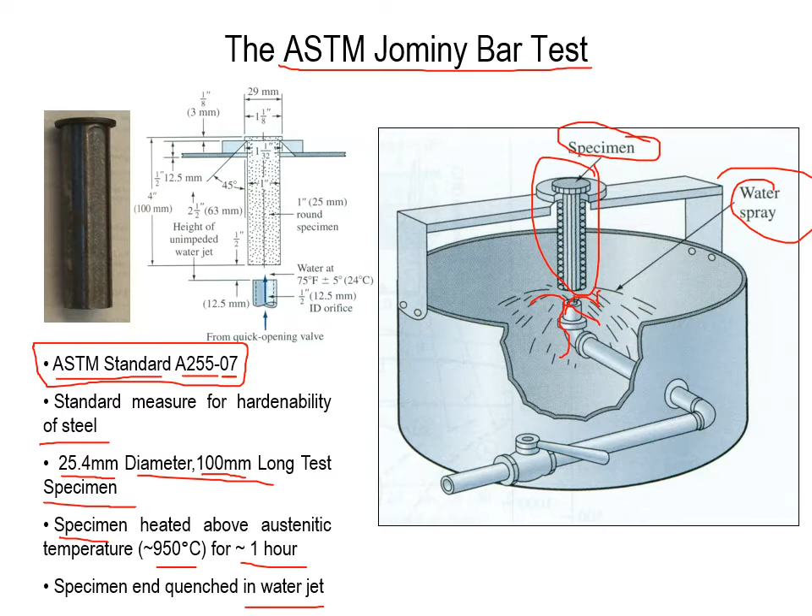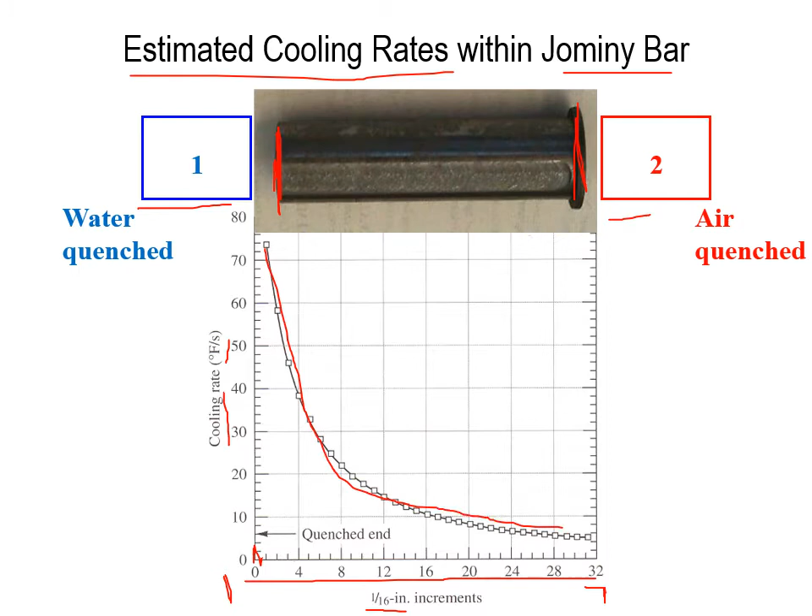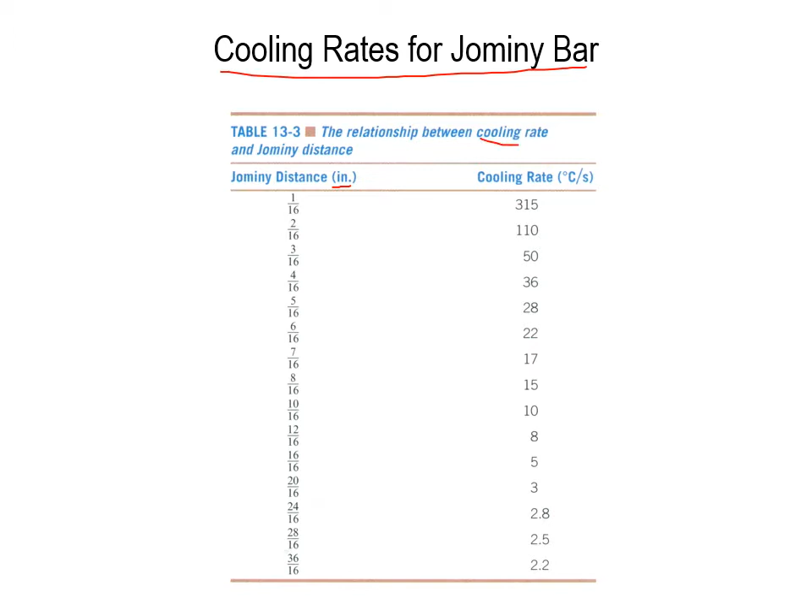Looking at the cooling rates for the bar in this T-chart, we see our distance here, in inches, and the relationship between cooling rate and distance. At a distance of 1/16 inch, our cooling rate in degrees Celsius per second is 315. As we get further away, up to 36/16, our cooling rate drops all the way down to 2.2 degrees Celsius per second.

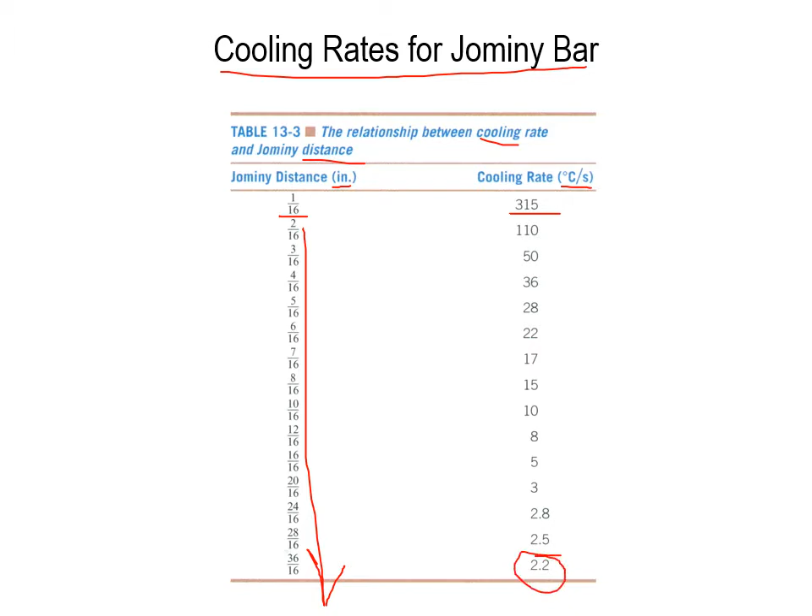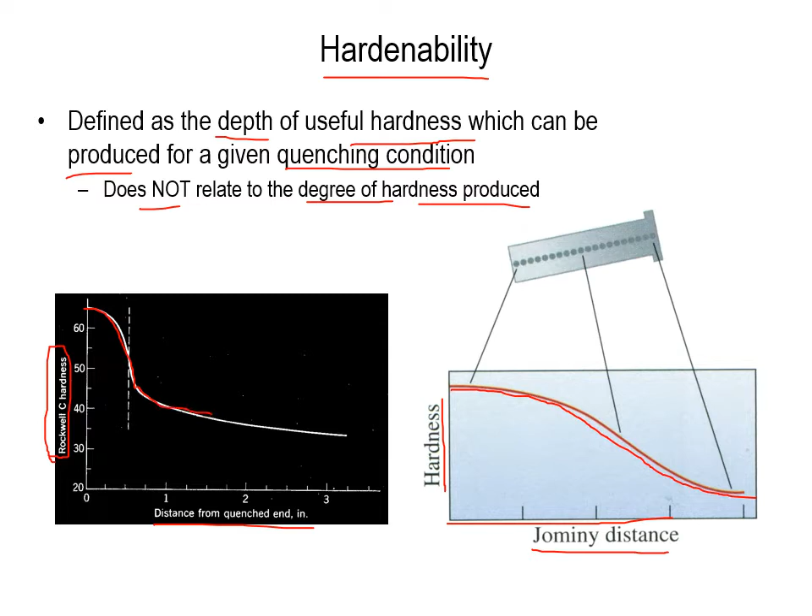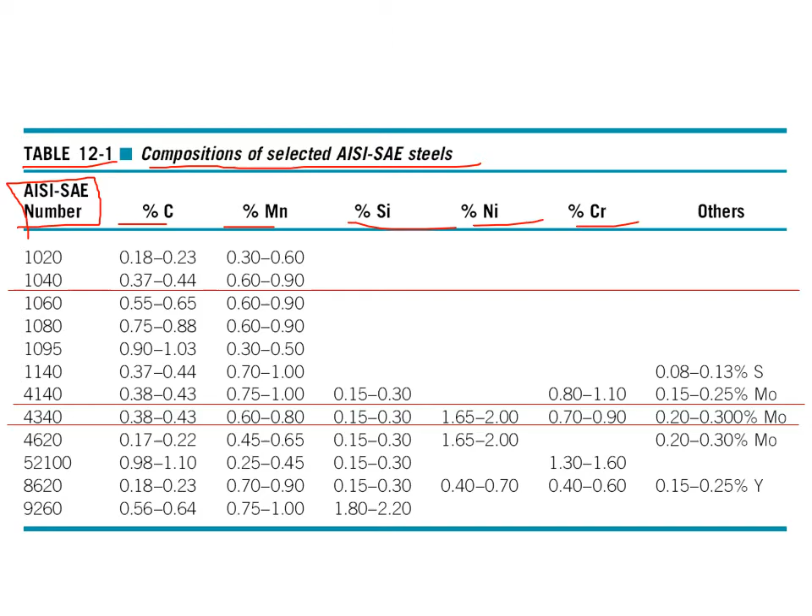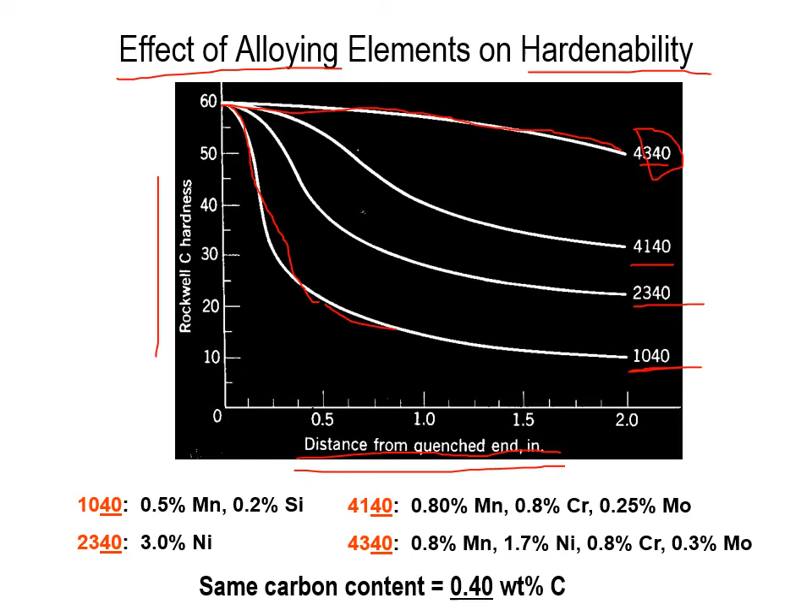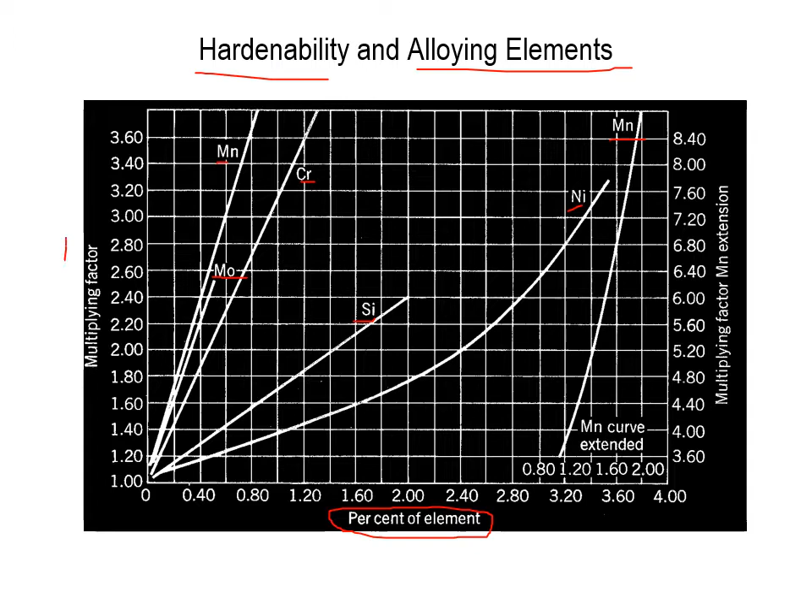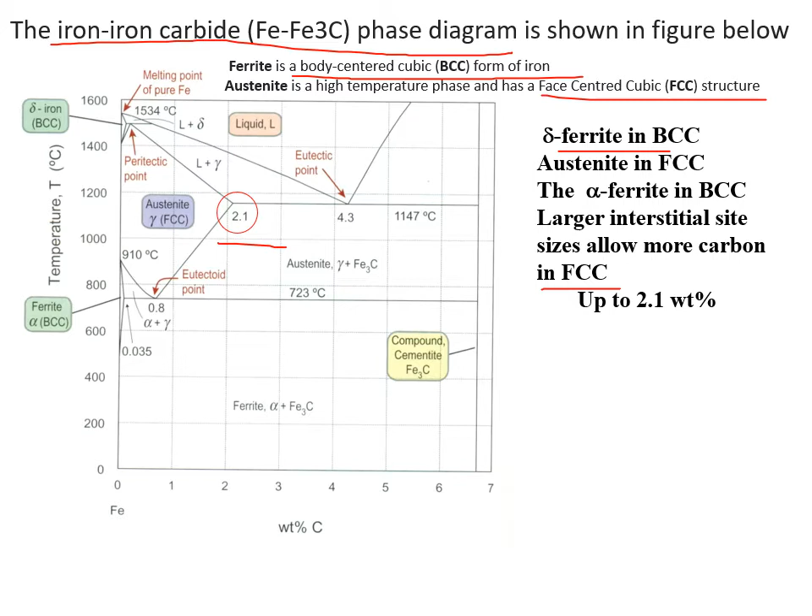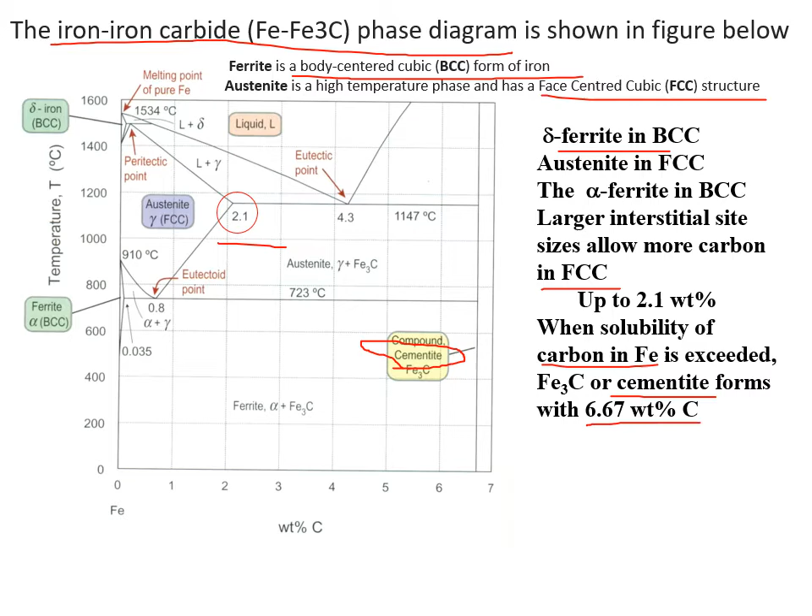When solubility of carbon in Fe is exceeded, we're going to see the formation of cementite down here. So cementite, Fe3C, is going to be formed when the solubility of carbon in the iron is exceeded. You can see here this is 6.67% weight carbon, if we follow that right down to there.

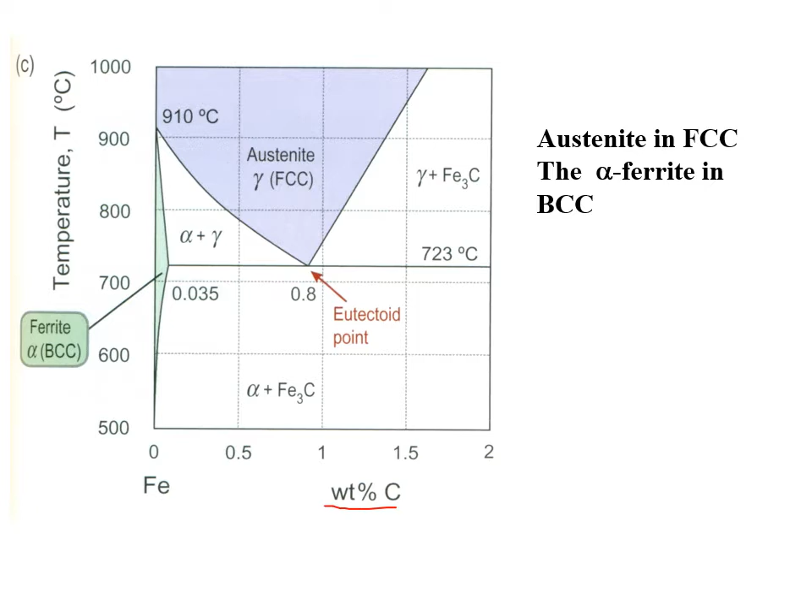In this diagram here, we have our austenite and our ferrite. Austenite again is face-centered cubic, ferrite is body-centered cubic. You can look back over at our graph on our x-axis where we have our percent weight of carbon, and on our y-axis we have our temperature in degrees Celsius.

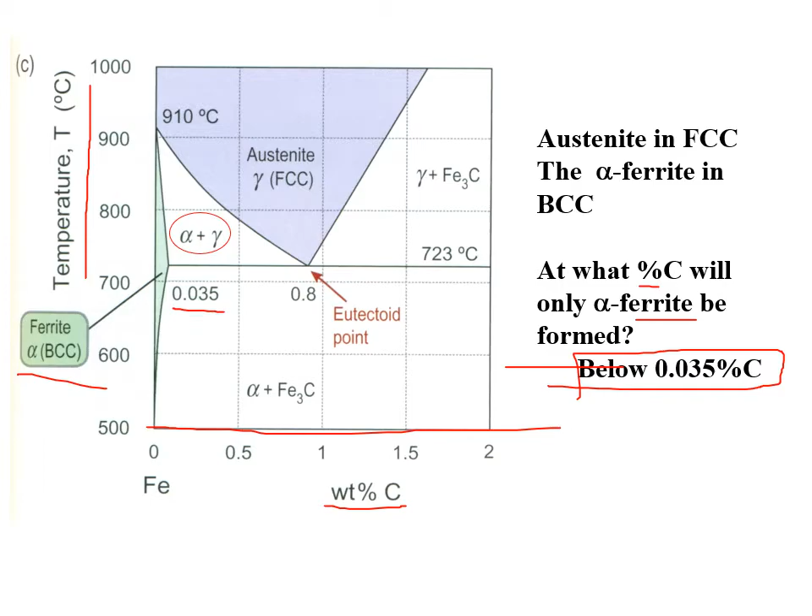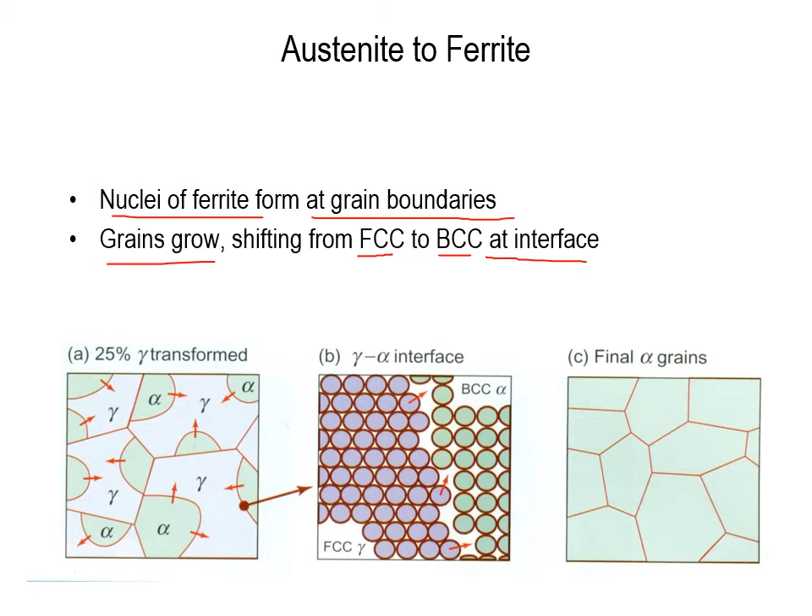Looking again at our percent weight of carbon versus temperature graph, zoomed in now from 0 to 2, what we want to look at is the eutectoid reaction. We can see this occurs at 723 degrees Celsius on our y-axis for a weight of 0.8 percentage of weight of carbon, which we come down to on our x-axis right here.

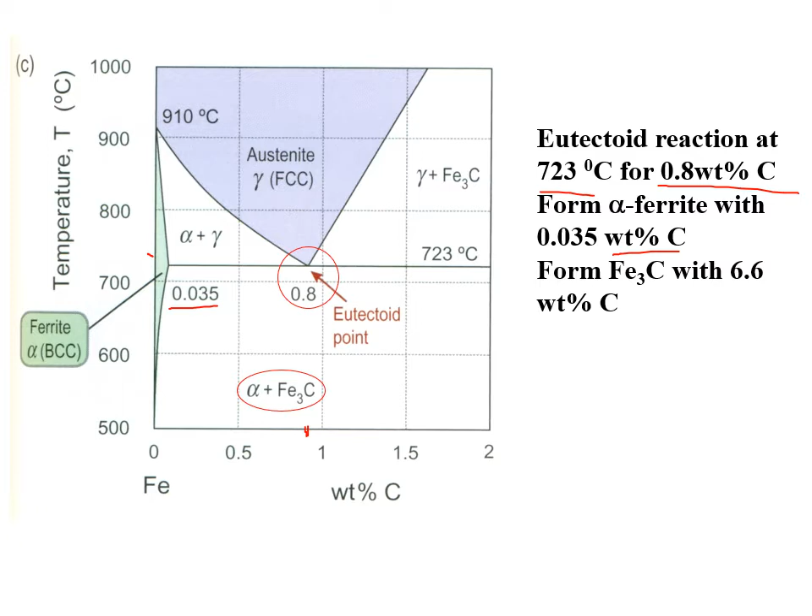Remember, if we take a look over here, we can see ferrite forms with a 0.035 percentage weight of carbon. And cementite forms here, if we recall from a couple slides ago from the larger graph that went out to 7, this occurs with 6.6% weight of carbon. So the carbon in austenite goes to the cementite, and the iron in austenite goes to ferrite, and the result is pearlite.

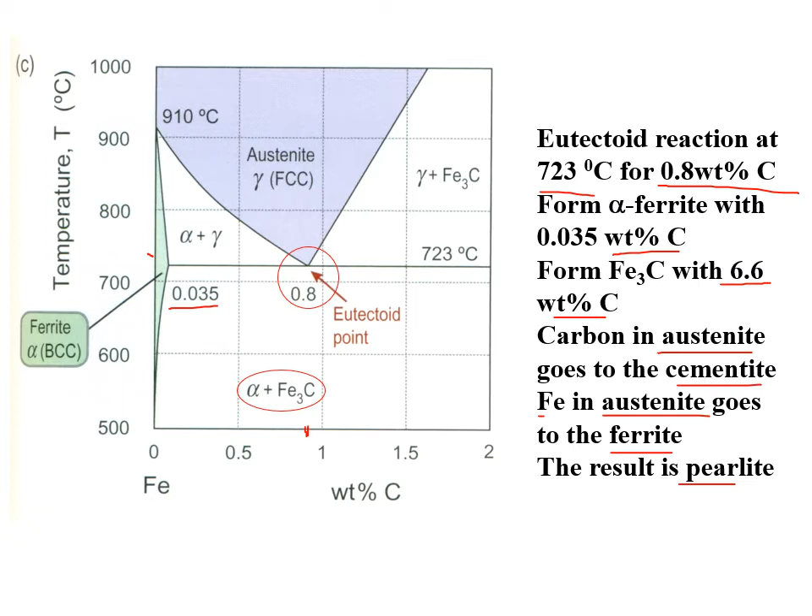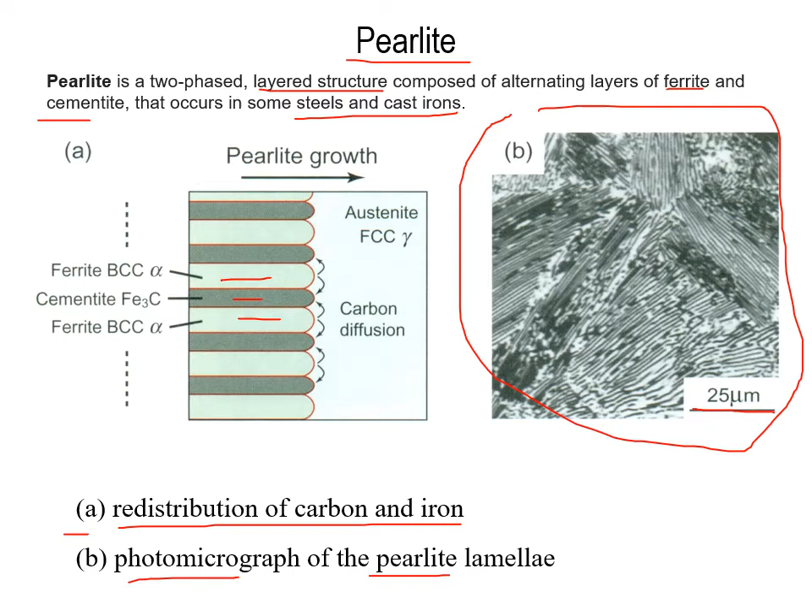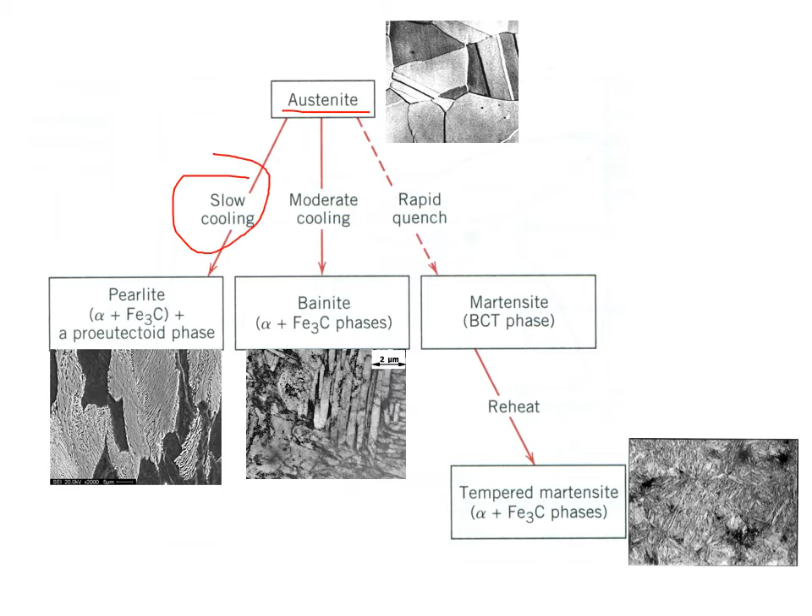In this slide, we can see how our method of cooling the austenite can affect what structure we're going to have afterwards. If we do a slow cooling, we form pearlite. If we do a moderate cooling, we have bainite, and a rapid quench here is martensite. If we reheat this, we can get a tempered version as well. We can see in the diagrams what the structure looks like between the different types of cooling.

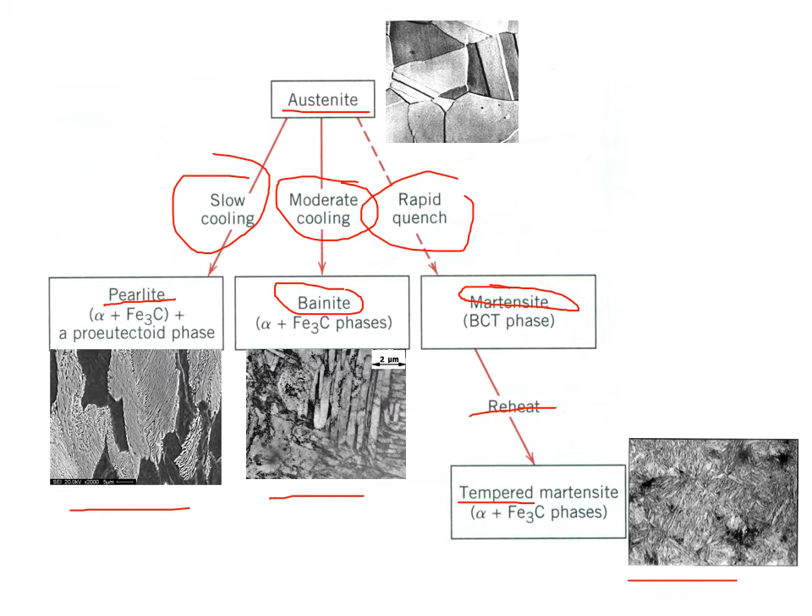Now we're going to discuss our bainite and martensite microstructures. Bainite consists of ferrite plates separated by retained cementite spheres. And now martensite, which is very hard, induces a BCT, a body-centered tetragonal crystal structure of ferrite and cementite.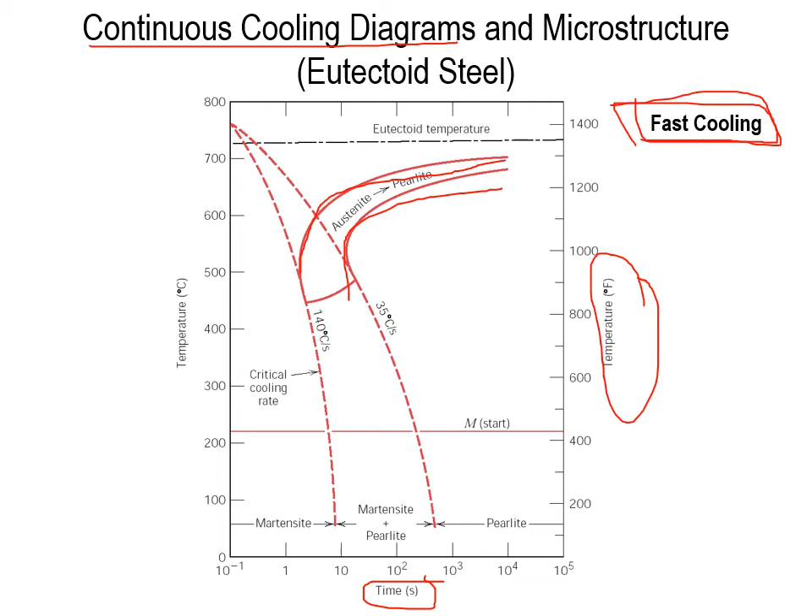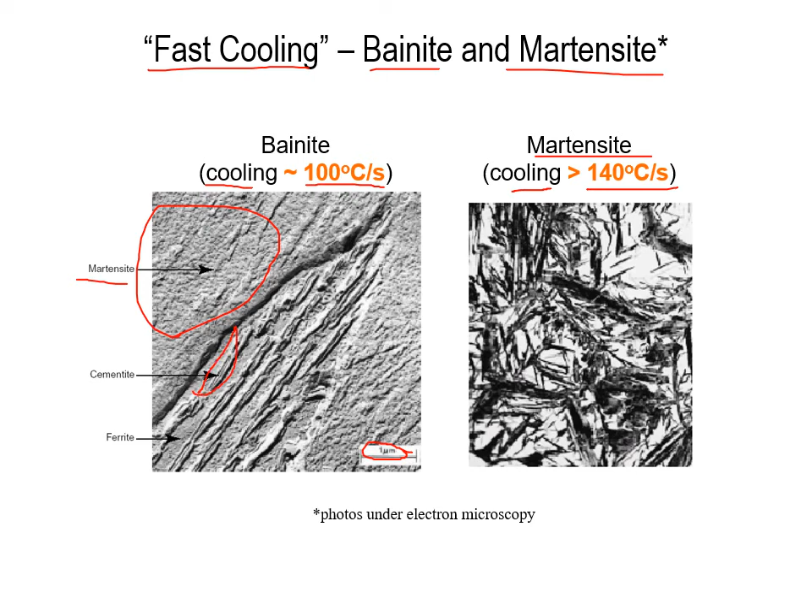Now for fast cooling, we have our bainite and our martensite. For bainite, we're talking about cooling at approximately 100 degrees Celsius per second, and for martensite, the cooling is going to be greater than 140 degrees per second - and we can see the difference in the structures. If we look at the left under electron microscope at the bainite, our scale is 1 micron at the bottom. We can see our martensite in this structure up here. We have our cementite right there, and in between here we have our ferrite.

So now let's talk about the outline for our experiment 4, lab 4. The materials we're going to test are our 1018, 1045, 4140, and 4340 steels. This lab is broken into 2 weeks: week 1 we'll do heat treatment, water quenching, and air quenching. In week 2 we'll move on to Rockwell and Vickers hardness testing. Only one lab report is due at the conclusion of both weeks.

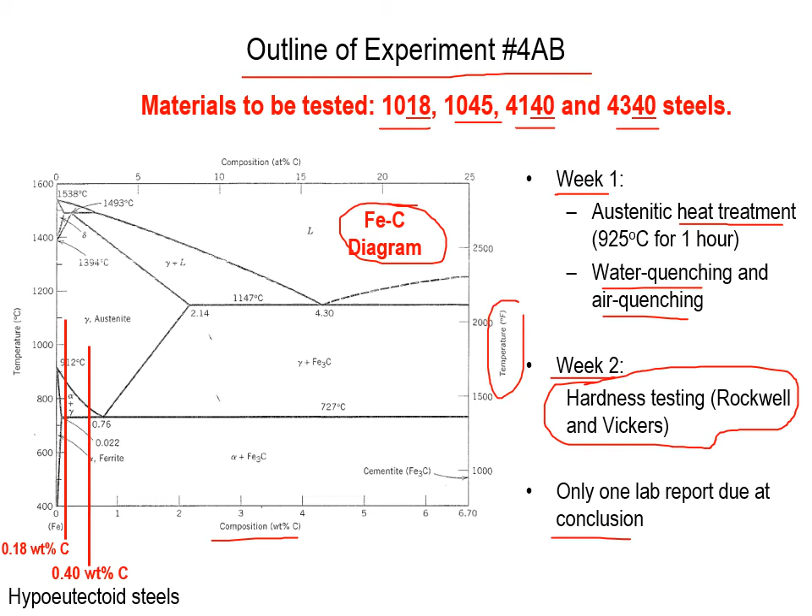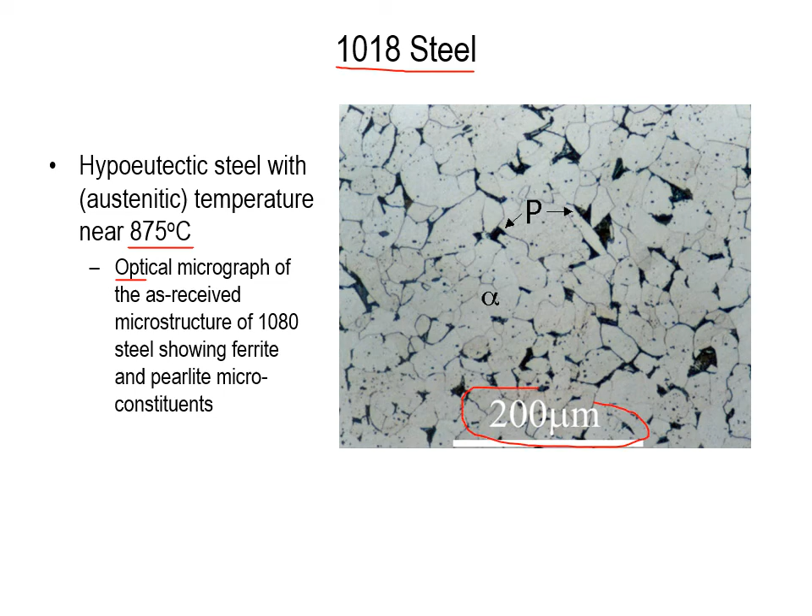Over here we have our diagram again with composition, percent weight of carbon on the x-axis and temperature in degrees Fahrenheit on the y-axis. Looking at our 1018 steel, this is a hypoeutectic steel with austenitic temperature near 875 degrees. We can see the optical micrograph of the as-received microstructure of the 1080 steel showing ferrite and pearlite. Note our scale here is 200 microns.

Now, talking about our 4140 steel, we can see its composition is between 0.28 and 0.33% carbon, so it's a low alloy steel. We can see the breakdown for the other elements in the whole composition. It's a hypoeutectic steel with A3 austenitic temperature near 845 degrees, compared to our 1080. We can see our micrograph over here with a scale of 50 microns, showing the as-received microstructure of our 4140 steel with ferrite and pearlite.

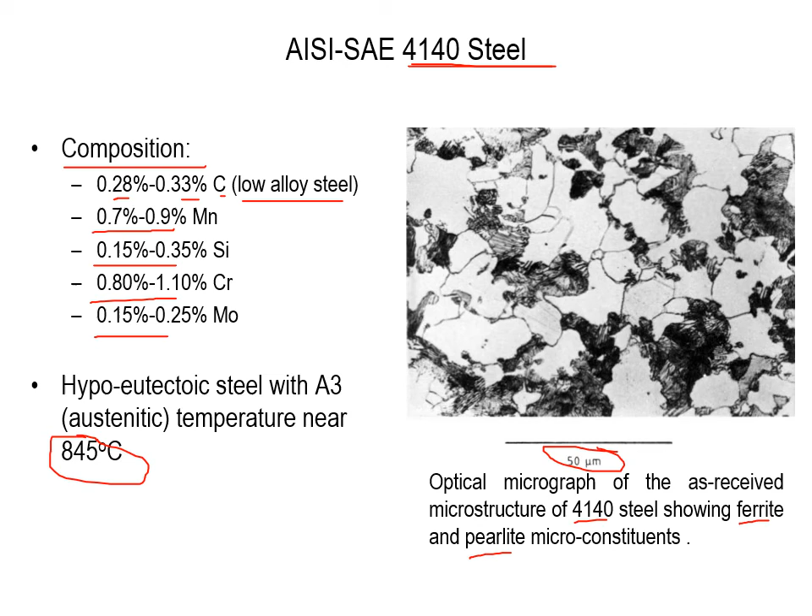Now let's go back and look at our graph for hardness versus distance from the quenched end. This is our hardenability and carbon content curve. We can see the carbon content given by each curve and how that relates based on distance from the quenched end to the hardness of our steel. This shows the effect of increasing carbon on hardenability.

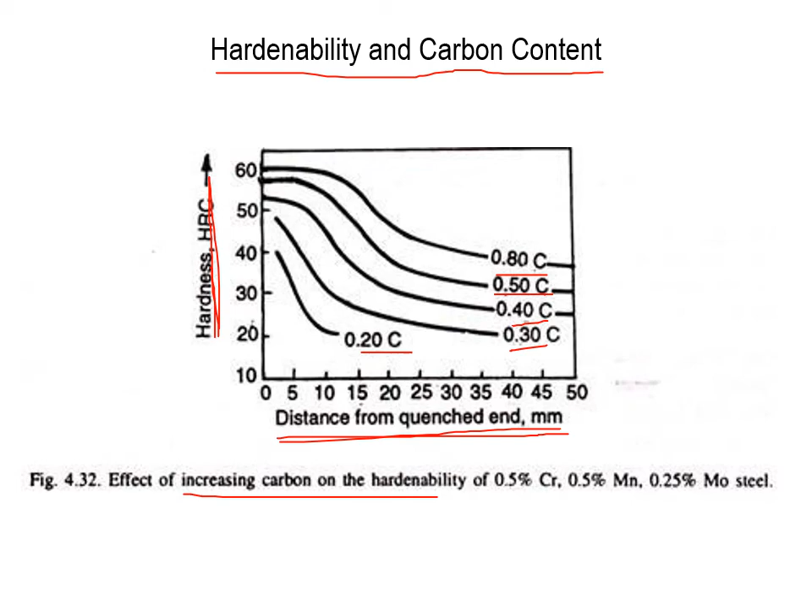Now let's look at our TTT diagram for 4140, chromium-molybdenum steels. On the x-axis we have time in seconds. Pay attention to the scale here, as we quickly go from half a second up to almost a full week. Also pay attention to the units on the y-axis, which is temperature, but we have the option of degrees Celsius or Fahrenheit. This becomes important for your calculations and looking things up on graphs. For your lab, are you dealing with Celsius or Fahrenheit? Make sure to convert between the two if needed, or if you don't have a graph with both. On the right-hand side we have our hardness as well.